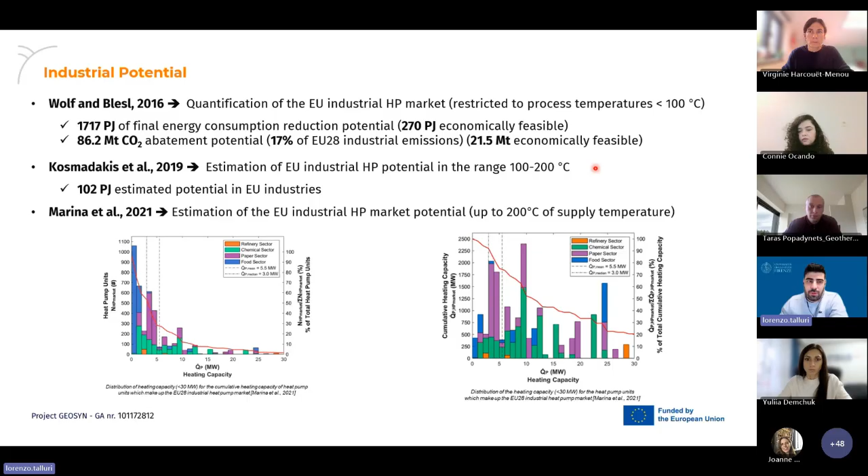Indeed, there could be a nice sector coupling between geothermal energy and industrial processes. Particularly, there are lots of industries such as paper, food and beverages, and chemicals that require temperatures between 80 to 200 degrees Celsius. This could allow the utilization of high temperature heat pumps or normal heat pumps as key technology for enabling next generation and fossil fuel decarbonization.

This is what we want to try to solve, or at least to think about, in the GEOSYN project. The GEOSYN project aims to develop an integrated solution that harnesses geothermal energy. Particularly, we have a geothermal source at about 120 degrees Celsius, upgraded with a high temperature heat pump, and also providing cooling for chilling at about 12 degrees Celsius.

In lots of industrial applications, there is a need both for heat for thermal processes and for cold. For example, in agri-food, the requirement for both heat and cold is very widespread. We at UNIFI are the scientific coordinator of the project and work package leader for the thermal design of the system, and we are trying to coordinate this innovation within GEOSYN.

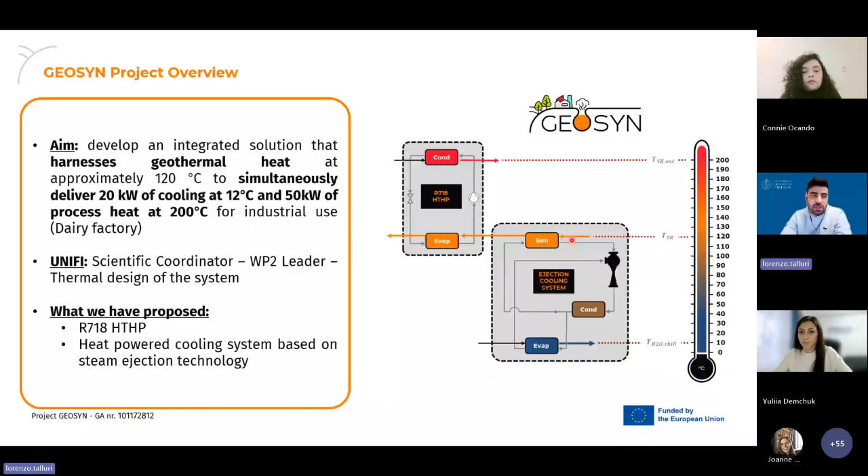GEOSYN project partners are APRE, Geothermal Ukraine, COSVIG, University of Florence, Rivacol, NeoEco, SDU, and SINTEF. This small consortium is very goal-oriented in order to provide an effective solution.

The most innovative part of the GEOSYN project is the benefit of using water as the working fluid. Why water? Because water is the most natural working fluid, with GWP 0, ODP 0, and no PFAS issues. It's not toxic, not flammable, and very cost effective. Moreover, it has very high potential because, for example, the latent heat of condensation at 25 degrees Celsius is 14 times higher compared to R134A.

Obviously not all that glitters is gold, and there are some issues with water, specifically the high specific heat ratio, the very high specific volume of steam, and the normal boiling point of 100 degrees Celsius. These characteristics bring issues that need to be solved: high discharge temperature at the compressor exit, high volumetric flow rates, and compression ratios, especially if we go with the evaporator temperature lower than 100 degrees Celsius, meaning subatmospheric conditions.

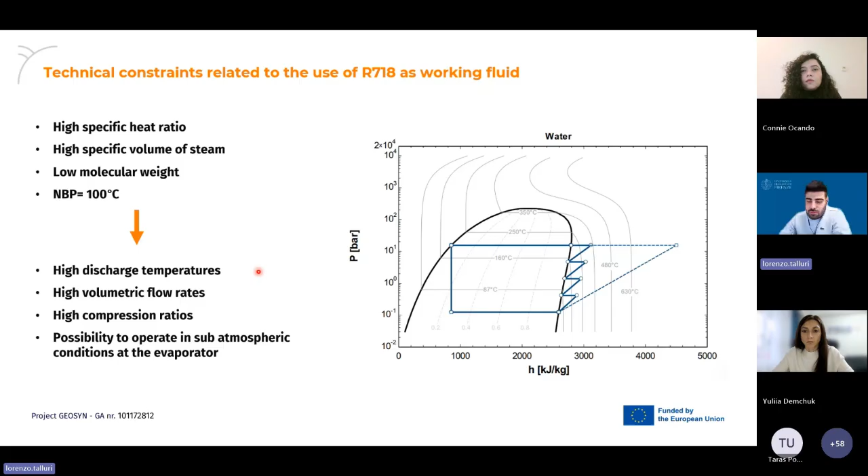So what we needed was a flexible configuration where we have at the evaporator a temperature of about 120 degrees Celsius, and indeed we have steam entering the cheese factory, which is the case study, at between 130 degrees Celsius. We already have a monitoring system placed at the demo site, so we know the conditions of temperature and pressure.

The goal was to develop a heat pump with a condenser duty of 50 kilowatts, a temperature lift of at least 80 Kelvin, and a supply steam temperature of at least 180 to 200 degrees Celsius.

Thanks to these constraints, we obtained a collaboration with Officine Mario Dorin, who are developing a reciprocating piston compressor for this project and also for the twin project TECHIS. This compressor will have 4 stages of compression.

And then the solution implemented: there will be a high temperature heat pump with 4 stages. We have the condenser, internal heat exchangers, and the evaporator. And we also have a receiver for the flexibility of the system.

We can see that with this solution, we could reach, at least theoretically, a coefficient of performance, from a temperature lift of 80 Kelvin from 120 to 200 degrees Celsius, of 3.6, which is well above the target that we set during the proposal writing.

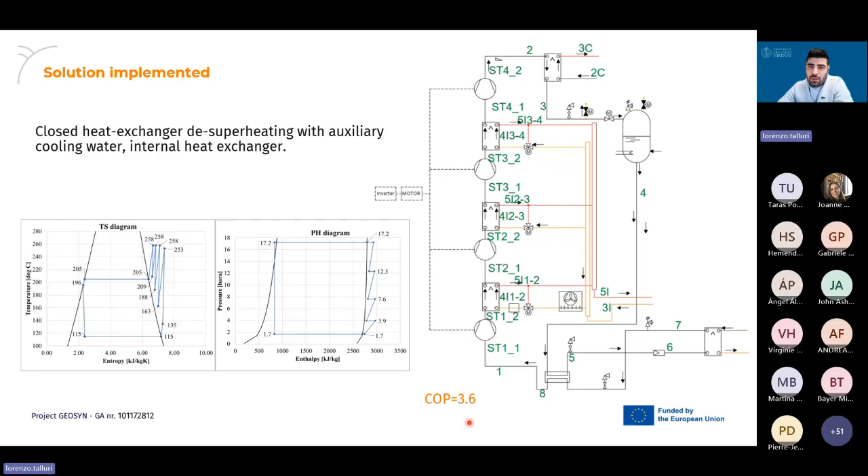This is just one piece of GEOSYN. The other piece is about the ejector cycle, which is still innovative and still uses water as working fluid. We provided thermodynamic modeling with several configurations and also a computational fluid dynamic analysis for the ejector that we will be designing and building completely anew for the GEOSYN project.

Thanks to the calculation of this kind of plant, we will implement this solution: an evaporator where there is direct injection of the water. There are two cycles, let's say a motor cycle, where the water is converted into steam and then provided to the ejector, and then the refrigeration cycle, where the cooled part will go to the case studies, basically speaking. So we have this kind of cycle, one close to a motor cycle and one a refrigeration cycle.

The effective coefficient of performance of this kind of solution is about 0.5, which is quite a good result if we think about heat-powered refrigeration systems.

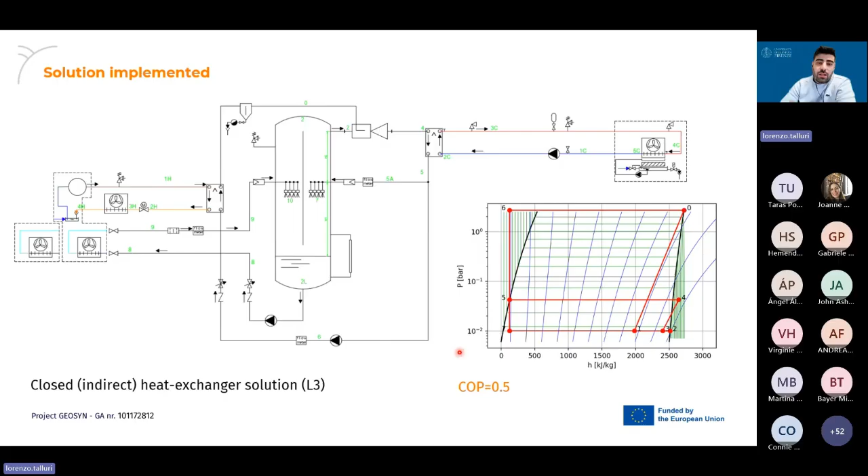And then we have the case studies. We have a real case study, the San Martino dairy factory, which is very close to the Enel Green Power plant, Nuovo San Martino. We have a steam pipeline that provides heat directly to the cheese factory.

We will be able to upgrade this heat and downgrade it to cooling requirements through the innovative GEOSYN solutions. Furthermore, thanks to the work of the whole consortium, we also found several case studies where the application of the high temperature heat pump could be exploited.

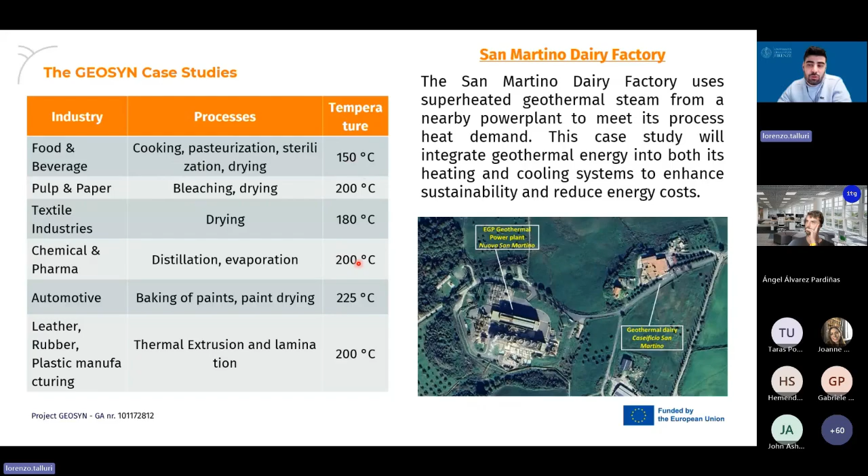But also for the cooling system, this could be exploited, like in the food and beverage, pulp and paper, and textile industries, and then we can see the level of heat temperature required that could be covered by the GEOSYN solution.

So I want to draw my conclusions. Particularly, GEOSYN tries to demonstrate the viability of medium-grade geothermal heat in order to provide both heating and cooling for industry.

The innovative part is the utilization of R718 water as working fluid, both for the high temperature heat pump and for the cooling cycle, which are totally heat-driven. Both technologies are showing potential for coupling with the industrial sector and are especially effective where concurrent heating and cooling are present.

So, paving the way to an energy efficient and decarbonizing manufacturing. Thank you very much for your attention.

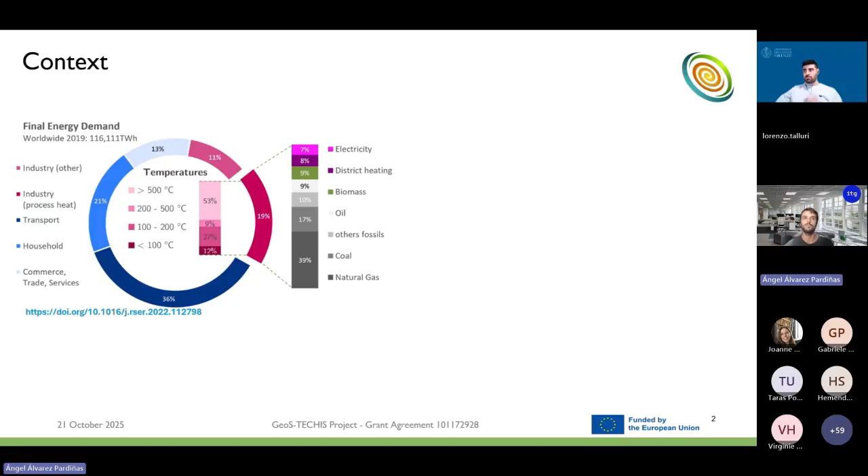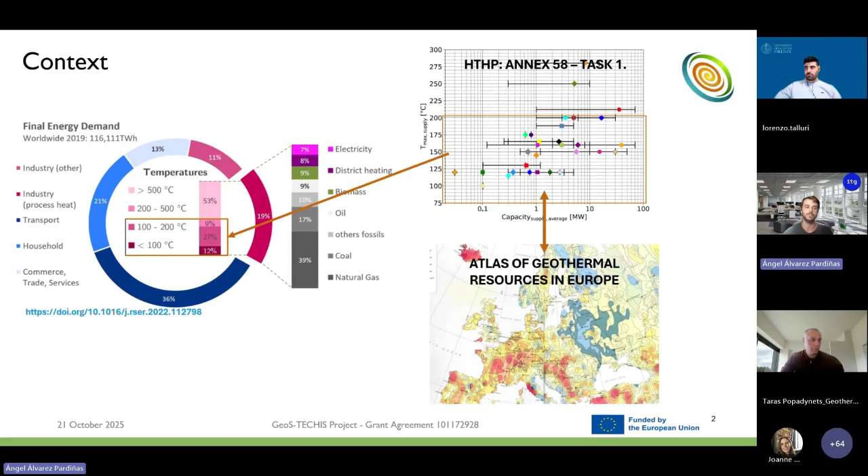Geothermal resources in the range of around 100 degrees Celsius could make a good opportunity for this, and they could be more widespread than the conventional uses of geothermal energy for electricity production nowadays. This is, in a way, the context that powers TECHIS.

TECHIS is an EU-funded project with the focus of decarbonizing industrial thermal processes with geothermal energy and other technologies that have been or are being developed around geothermal energy. We are 10 partners plus one affiliated, spread all around Europe, working collaboratively in this project.

The general picture is not very different from Geosyn, in that we are building on this binomial of geothermal energy at the low-medium temperature range, around 100 degrees Celsius or so, and developing technologies to meet heating and cooling demands for industries. Of course, to bridge this gap, there has to be some thermal system, which we will introduce later, and some other technologies which allow us to take the most out of this binomial of geothermal energy and the demands we are trying to meet.

All in all, in TECHIS, we are trying to support the green transition of industrial thermal energy, reduce the carbon footprint of these industries, contributing to the EU Green Deal, and developing technologies which are transferable to other sectors, not only to the demo site we will introduce later, but also to different heat sources, which could work together with geothermal or even substitute it totally.

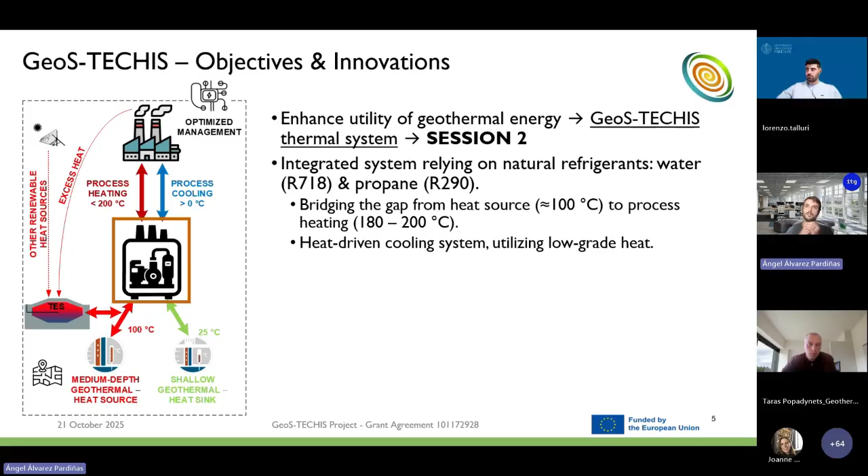For this, we have a specific presentation today in session 2, given by my colleague Christoph Vanasiak from Sintef Energy. I really hope you will be present there, and he will introduce the technology a little further. The idea is that we will have a system which integrates two solutions based on natural refrigerants: a water R718 high temperature heat pump plus a propane ejector cycle, utilizing the low grade heat to produce cooling.

The second of the objectives and innovations within TECHIS is to push the limits that currently exist for thermal energy systems, storage systems, and underground thermal energy storage, in a way that we can push them further in temperature. Currently, they are basically limited to 90 degrees Celsius or so, according to the literature. We want to help, or bring our contribution, to make them more suitable for industrial flexibility.

We are trying to identify the right concepts and model them so that these thermal energy storage systems become usable, not only for our thermal system, the high temperature heat pump plus ejector system, but also for direct use in industry. All in all, thermal energy storage will contribute to the stability of the industrial process and let us leverage heat sources such as industrial waste heat, solar energy, or other renewables.

A very important part of the work we are doing in TECHIS is to develop innovative heat transfer fluids, namely nanofluids, which allow us to store energy at temperatures which water or non-pressurized water does not allow us. So we are developing these fluids which will allow us to store energy at 100 degrees Celsius or above, with excellent heat transfer and heat storage capabilities, and of course, non-toxic and safe to use.

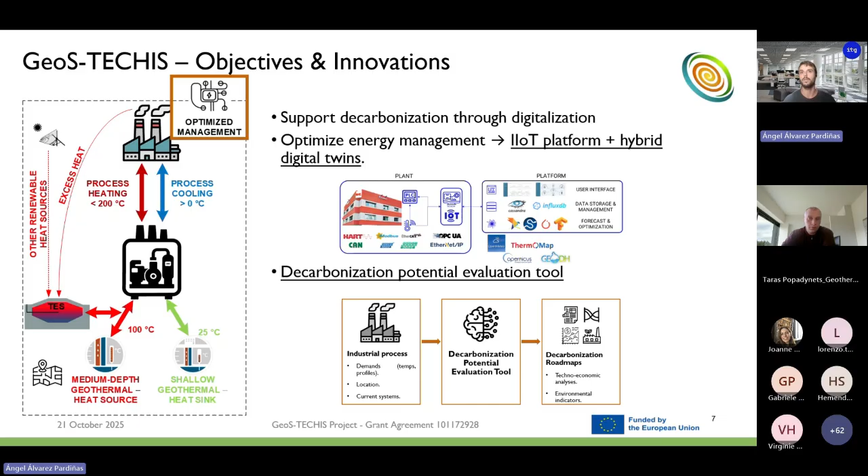So it's a technology, or a tool, which based on data available today, such as satellite data and geophysics data of a certain location, will be able to bring us the right outputs on whether a specific location can be suitable or not for geothermal use, and at which temperatures and at which depth, etc.

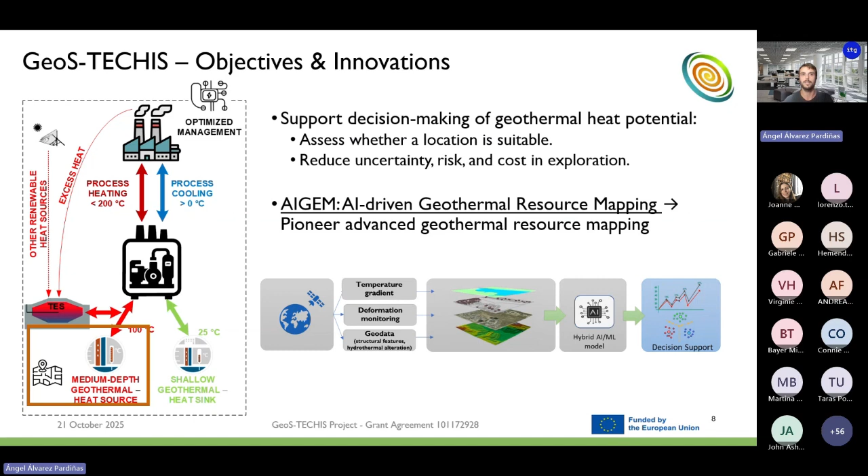Last but not least, the fifth of our objectives: there are a lot of misconceptions around geothermal energy and geothermal supported energy systems, and TECHIS is trying to promote the knowledge and acceptability of these systems, first by properly assessing the environmental and societal impacts they actually have.

We have in session 2 today a presentation which will be held by our colleagues in Leitat, in Catalonia, Spain, around this topic, so I will not disclose too much right now. But the idea is to actually assess what is happening in these kinds of systems, to understand which is the actual knowledge of society and industry on the potential of these systems. In the end, we will provide in TECHIS materials to communicate our findings and educate industry and stakeholders around the topic.

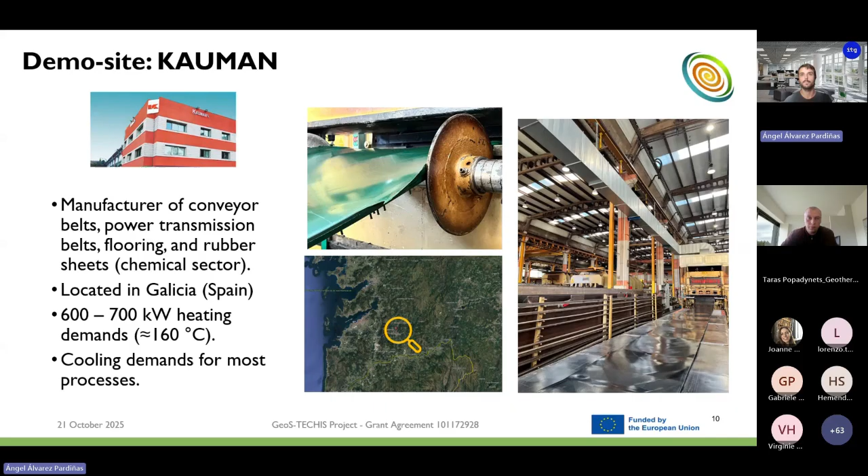And last, I would like to introduce the company which is our partner, helping us validate all these technologies and developments - Kauman. They are a partner of our project, they manufacture conveyor belts and power transmission belts, located in Galicia, Spain, northwest of Spain, above Portugal. It's the perfect example of industry combining heating and cooling demands at the temperature levels we are aiming here at TECHIS.

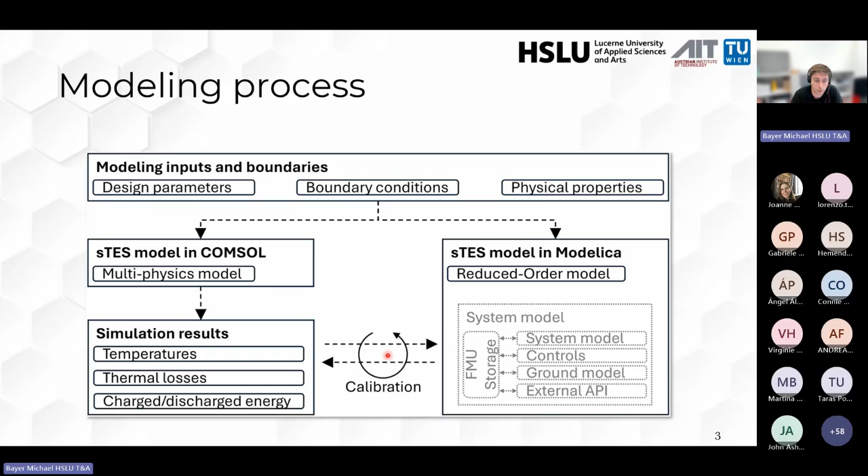Here you can see the key design parameters which we used. So the parameters have different size variations. We made simulations from 20,000 up to 200,000 cubic meters with the given parameters here in the list for soil and fluid and so on.

For the simulation itself, we made 5 complete annual cycles, where one cycle is represented by 90 days of charging, 90 days of storing, 90 days of discharging, and 90 days of idle phase. In total, we made a 5-year simulation, and for comparison of the results, we use the 5th year.

Here you can get a quick insight on the COMSOL model which was used. It's the DePlaTES model developed by AIT. This is supported by the finite element method, and it includes multiple features, so you can simulate all kinds of different seasonal thermal energy storage systems with it. For this study, we focused on a water-based system without groundwater flow in the soil.

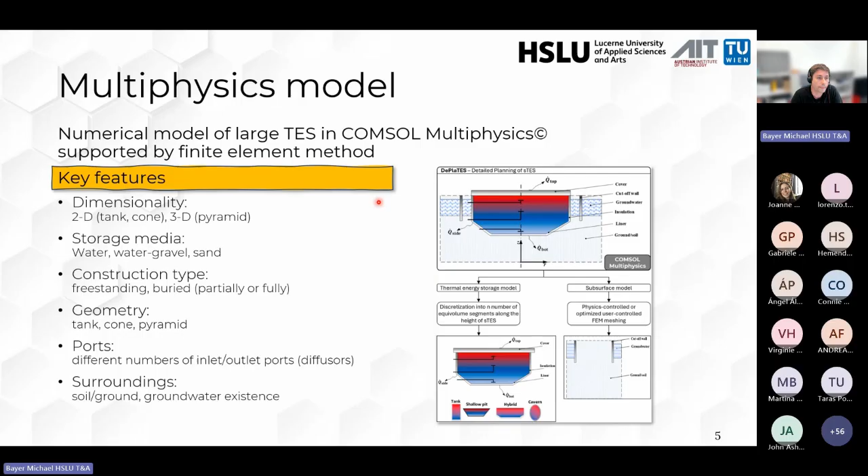We used equidistant discretization for this. For the study, we used 200 layers within the tanks, and you're able to connect basically each layer of the tank with in and out flow connections. Then for the ground model, we created a 2D grid with finite volume method, where each element is represented by a 4R1C network to simulate the interactions between the ground and the tank.

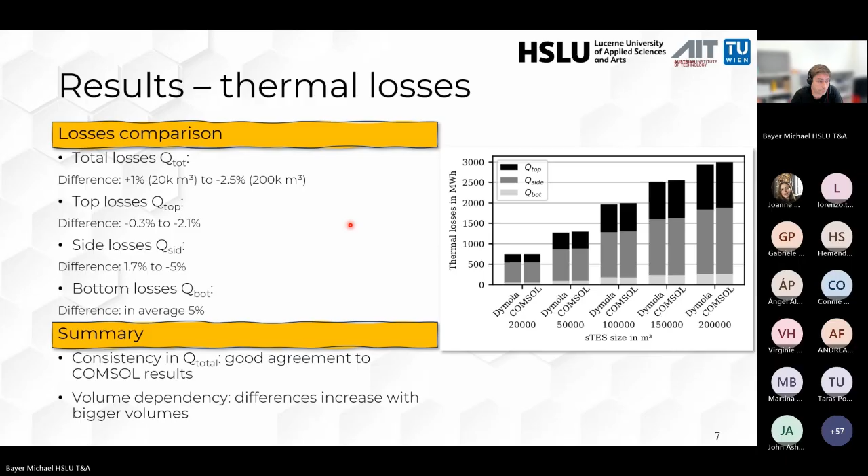dynamic events occur, the temperature profiles from the two models show minor deviations. For example, during charging, the Modelica model initially underestimates the temperature slightly, but once it continues, it slightly overestimates by 1 Kelvin. Those differences are largely due to solver settings and the different discretization methods used.

The COMSOL model uses advanced solvers, integrating the energy balance equation over the entire discretization element, but Modelica, for example, exports the temperature data at the center of each cell corresponding to a relative height and follows a nodal approach.

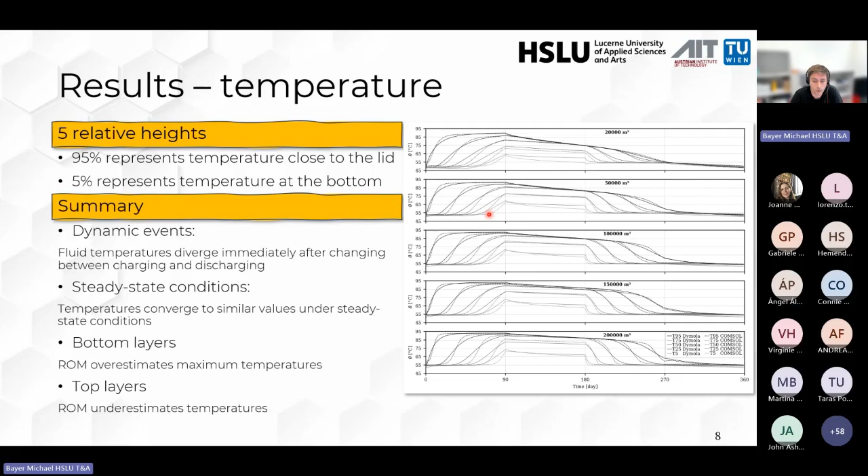Although there is still slight room for improvement, for example in extreme cases when the tank is very small or rather very big. What's also to mention here, as you can see, the best performer is the 100,000 cubic meter storage, but this is because we started with this one, and all the calibration and validation was done with it, and then we scaled it up and scaled it down.

Smaller storages basically have a higher surface-to-volume ratio, and in these cases, the thermal losses are more dominant and the stratification is less important. But for larger systems, they have stronger thermal gradients and stronger stratification, especially near the inlets and the tank bottom.

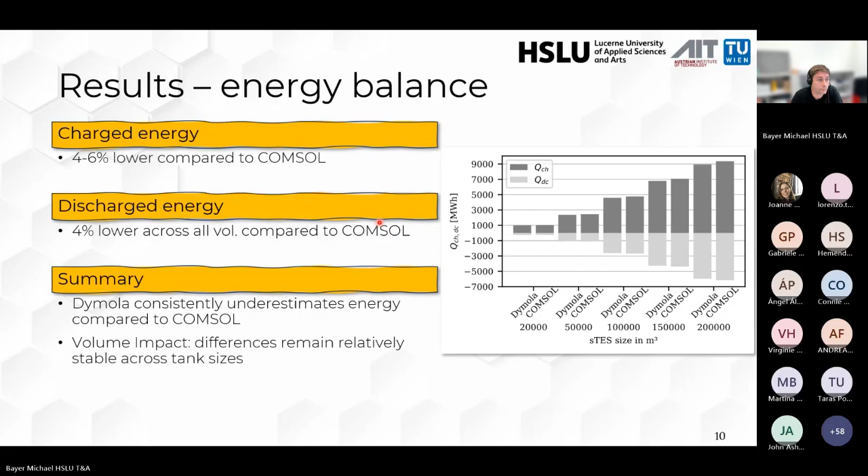and by use of the MUMPS solver. In Modelica, we used the Dassl solver, and we ranged time steps between 10 minutes and 1 day. For both comparisons, we used the same machine, and we were able to reduce the simulation time by up to 98%.

Which already brings me to the conclusion. The reduced order model has demonstrated strong performance, achieving deviations of less than 2% in temperature simulation. During the calibration against COMSOL simulation, the model was highly efficient, and we were able to complete a full year simulation in roughly 4 seconds.

For example, if we simulate something like Dronninglund, which is highly complex, then it increases. But for the annual simulation for Dronninglund, we still manage with roughly 1 minute simulation time.

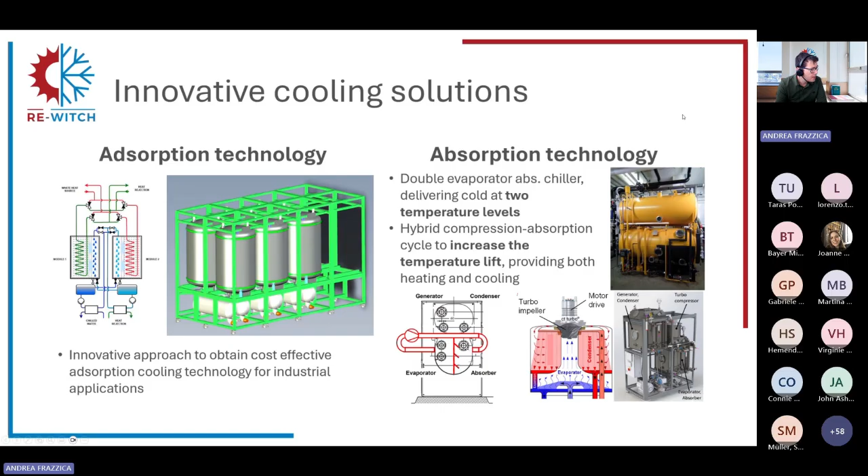The other technology needed for the full system is the solar thermal collector one. Here, we are not developing a new technology, but profiting from an existing one provided by the Swiss company TVP Solar. This is a unique technology because they work with flat plate solar collectors, but fully operating under vacuum, which means they minimize heat losses.

So they can reach up to 200 degrees C even without concentrating solar technologies. This has a very good selling point, because the installation in the plant is much easier—you don't need any concentrating or tracking, and in the end the maintenance is much easier. Our target will be to install this technology in parallel to the existing waste heat in order to provide heating to our absorption cycles.

The other point is on the designing of the demo site. We are basically working with two parallel tracks. One is profiting from a digital twinning environment to maximize the efficiency in the design.

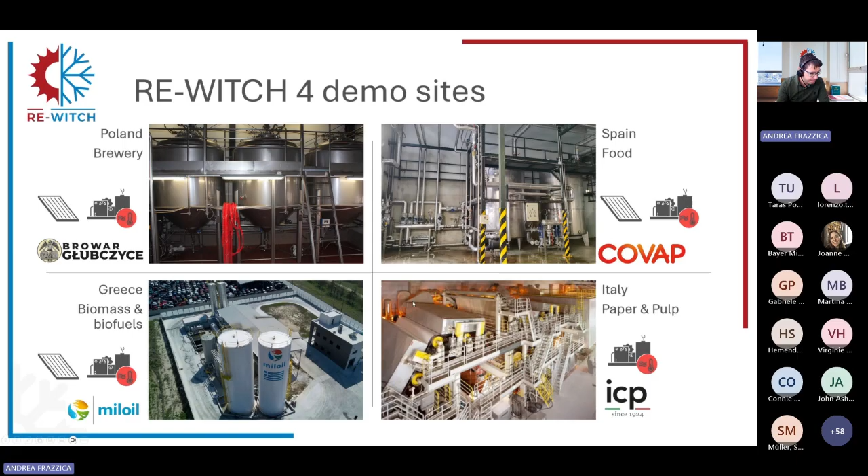Here is a quick overview of the current status of the different digital twinning we are developing for the four demo sites. Of course, we are now working on the current configuration, trying to model all the sections of the plants that will be affected by the RE-WITCH integration. Next steps will be to use this preliminary digital twin to derive the designing phase of each demo site.

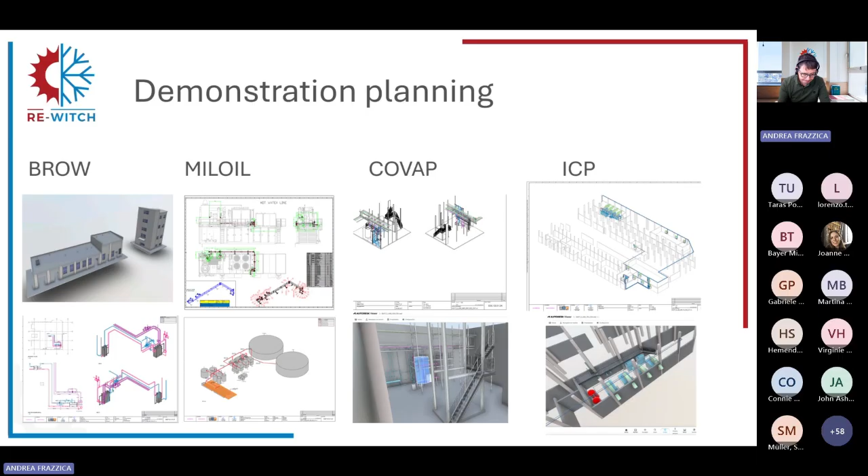So what's next? As mentioned, we are now in the manufacturing phase of the first prototypes. This will be ready probably by the end of this year, and then in early 2026 we will start the testing campaign in the lab infrastructures that are part of the project, in order to finalize the design and optimize the operation of the technologies.

We are now working on the cloud-based monitoring system that will be installed in all the demo sites to start the data collection for the baseline analysis, which will last for the entire 2026.

As mentioned, we are finalizing the design of the demo sites. We expect to have the design finalized by the first months of 2026, to move on with the procurement and installation of the equipment in all the demo sites until the end of 2026, in order to be ready to receive all the technologies on site and install them to start the final year of the project, which will be mostly dedicated to monitoring the technologies' operation.

Thanks for the introduction. My name is Simon and I'm a researcher working at the University of Applied Sciences in Ingolstadt, Germany. I'm happy you decided to join today and listen to my presentation about a modern benchmark of an adaptive thermal source network, at an industrial site called the InCampus, which was already mentioned earlier by Michael Bayer. The research related to this presentation is part of the INTERSTORES project.

As introduction, we will have a short look at thermal source networks in general. Afterwards, we will dive into the specifics with the system description, and I also brought some examples about the envisaged operation, first monitoring results, and one exemplary planning step.

Some of you might already know the concept of thermal source networks, short TSN. The IEA-DHC Executive Committee defined them as networks mainly used as a source for heating and cooling by decentralized technologies such as heat pumps, as you can see on the right side. There are multiple benefits of these systems, but I'd like to mention two right now: the low temperature levels of these grids, which make integration of renewables easy, and the fact that heating and cooling can be facilitated with the same infrastructure, increasing energy efficiency. We'll have a closer look at how that's achieved later.

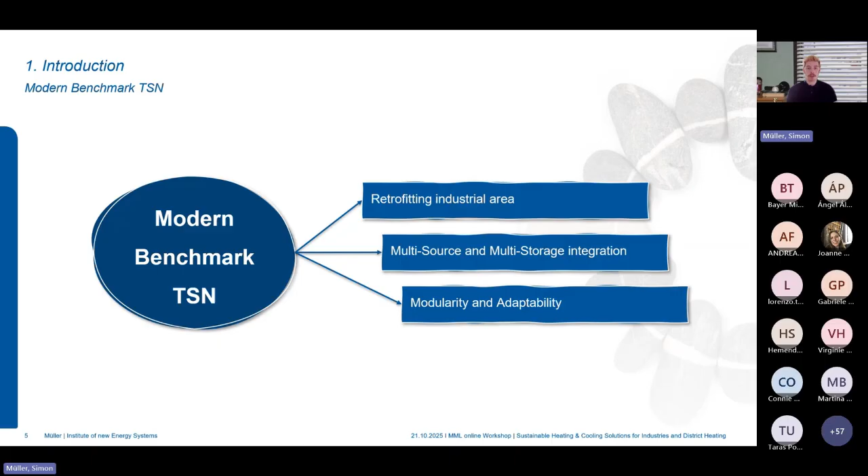With those two aspects of TSN, you can already see that they can help move to a more climate-friendly future. Today we're going to look at a system which can be seen as a modern benchmark of those TSNs in terms of retrofitting industrial areas, multi-source and multi-storage integration, and modularity and adaptability.

The TSN I'm referring to is called the InCampus, a planned 75-hectare industrial park which will consist of up to 70 non-residential buildings. The area of this project is situated in Ingolstadt, Germany.

But before I show you some recent information about the InCampus and the related energy system, I want to take a quick look back in time and see what was happening at the InCampus before.

Until 2008, the area we're talking about was occupied by a refinery, which started operation back in 1965. Sometime after the refinery shut down, the area was sold for €1 symbolic to the city of Ingolstadt and Audi, which is also headquartered in Ingolstadt. Both partners agreed to refurbish the area into an open technology park.

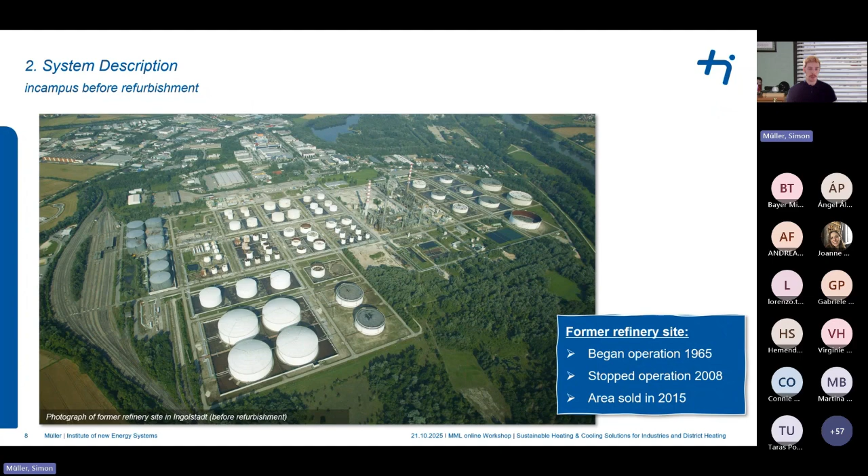Now we can already see that path from the old refinery site towards this new TSN system called the InCampus. All of that process started with a soil remediation process to get rid of the contamination left from the refinery's operation.

90% of the washed soil was again used on site, for example for land leveling. Some of the gravel part that was washed is being utilized in combination with old fire extinguishing basins, which you can see here, to build a seasonal thermal energy storage, which Michi Bayer mentioned earlier, part of the INTERSTORES project, which is pretty cool. So we're using pre-existing infrastructure to build seasonal thermal energy storages.

Next to that, there are also groundwater wells, which keep the remaining contaminants from being washed away, and those can also be used as a thermal source or sink for the TSN, which you will also see later on.

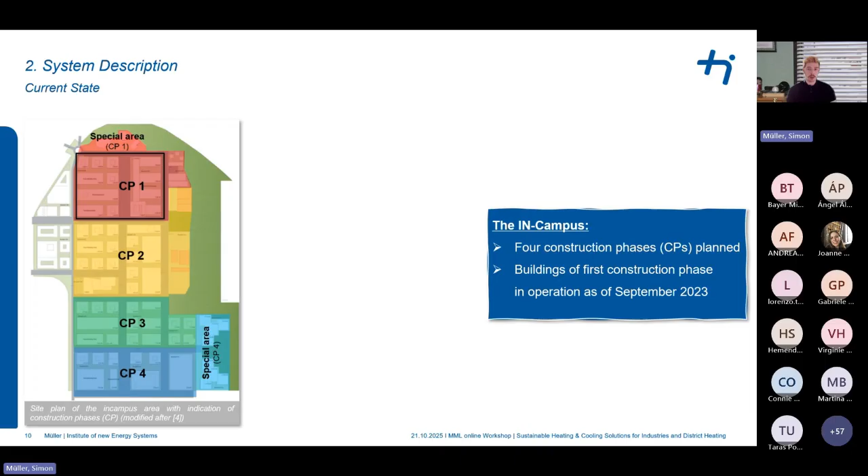Now that we're all cleaned up, we can start with the current state. Currently, the InCampus is still under development. Overall, there are 4 construction phases planned to develop the whole area, but since September 2023, the first 4 buildings of construction phase 1, which you can see here, went into operation and were connected to the TSN.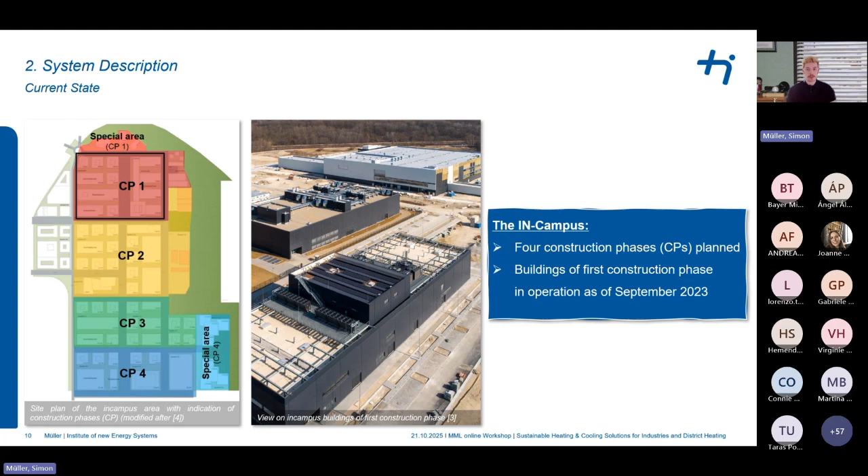The TSN infrastructure itself is already installed, so pipes are equipped for the following construction phases. It just needs new buildings to connect to it.

And now we will have a closer look at the envisaged operation of the buildings and networks in construction phase 1. There are 12 buildings planned for construction phase 1, some office buildings, a security center where security features of cars are tested, and a data center, which has a significant waste heat potential.

The demands of all those buildings in construction phase 1 sum up to around 7 gigawatt hours of heat demand per year and around 26 gigawatt hours of cooling demand. What you see at the bottom of the slide are the projected load profiles. In blue, you can see the cooling loads with an offset because of the steady cooling needs of the data center, and in red, the heating demands. You can see that a lot of the time those demands are overlapping, starting in September all the way through winter until mid of May.

There is something which can be called balanced demand. This is the case when one of the buildings connected to the network has a heating demand and another building, because of its function or utilization, has a cooling demand at the same time. So at the end of October, for example, the data center with its cooling demand will eject heat into the network via heat exchanger. And on the other end of the network, some office buildings with heating demands will extract some heat via the heat pumps. So instead of fulfilling the demands separately, the demands are balanced in the TSN.

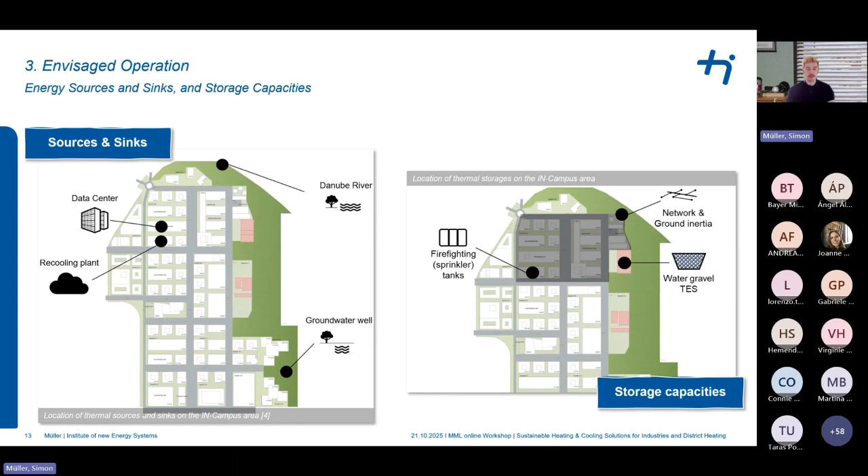And now we bring all of these components together, and we can understand the envisaged operation. In the center, there's the TSN, which is connecting all the different components of the energy system. Now, during winter, the buildings have a dominating heating demand, which is to some extent balanced by the waste heat from the data center. Additional heat supply can come from the thermal sources or discharging the S-TES.

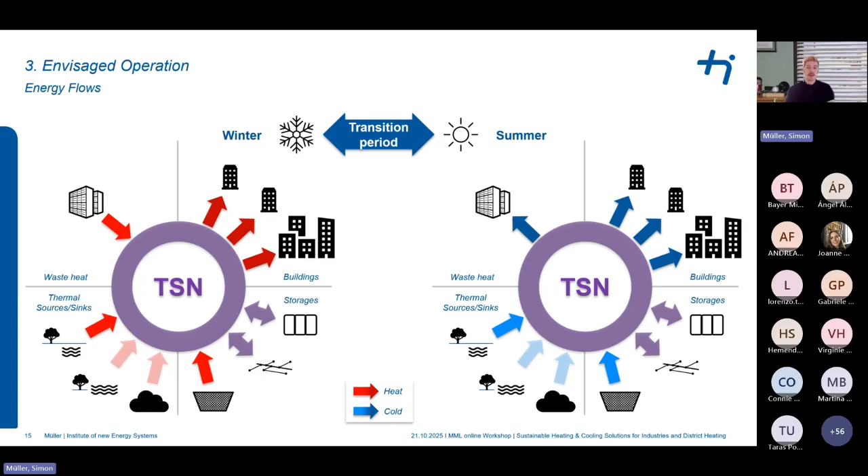Now, during summer, the demands of the buildings change, and most of them will have a cooling demand, or you could also say they supply exhaust heat to the network. The waste heat from the data center does not really help with that, but adds even more heat to the network. Accordingly, all the surplus heat is either charged into the S-TES, which is just another way of saying there is cold discharge from the S-TES, or the surplus heat is discharged to the displayed heat sinks. That means, for example, groundwater wells or the Danube are providing cooling energy, and that is why the blue arrow is directed towards the system.

And that is as far as I would like to go about the monitoring today.

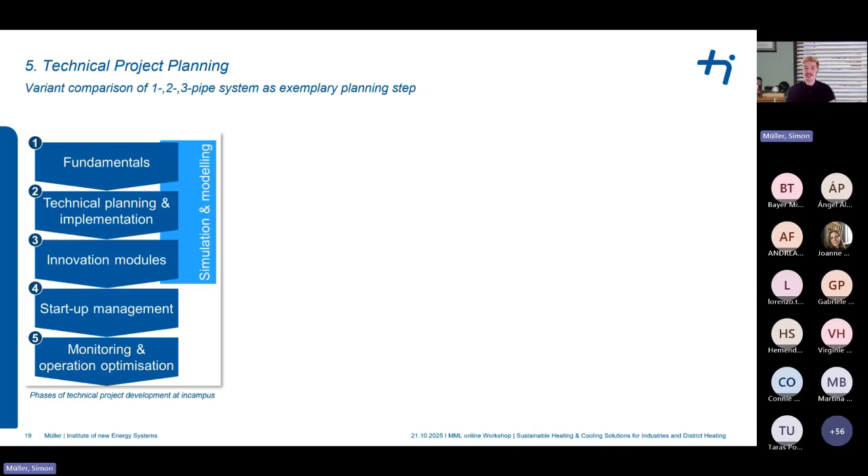But I brought some more insights into the technical project planning of the InCampus for reviewing the overall documentation of the project. The 5 main phases of the technical project development were derived, and because I don't have time to go into all the chapters in detail, I brought one exemplary planning step, which is the comparison of different network types.

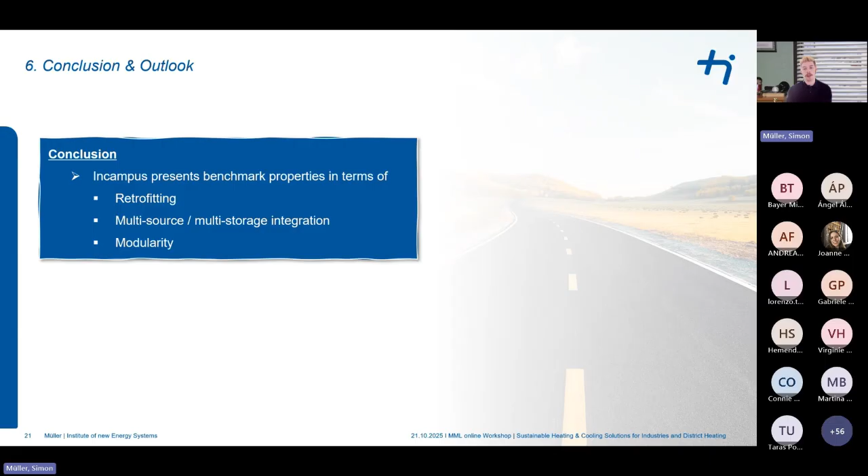Now we've seen a brief overview of the InCampus energy system, and in some details we were able to grasp the benchmark properties of it. Originating from a former refinery site, the InCampus presented itself as a benchmark in terms of retrofitting. With the planned operation, we could see the multiple sources and multiple storages that are already included or will be included. From the first monitoring results, we saw the system's operation in partial load, but even more important is that the energy system planning considers the modular expansion and integration of many more industrial demands in the future. Accordingly, future research will be oriented toward the transferability of the system. The first step in this regard is to analyze the planning process, which we did. So we have more steps ahead.

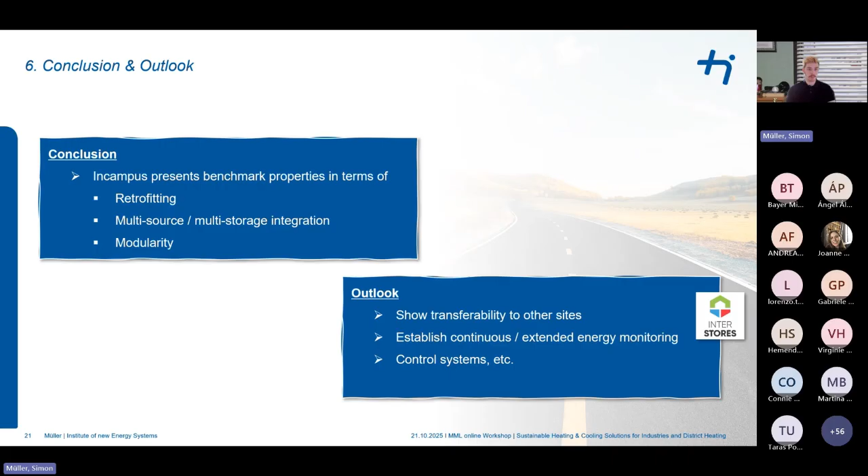Establish the energy monitoring to have a continuous report, not just once, and also go more in the direction of control systems, including the seasonal thermal energy storage, and maybe start to have an MPC at the InCampus. That would be all from my side. Thanks for listening, and I'm happy to answer questions in the chat or later in our Q&A session.

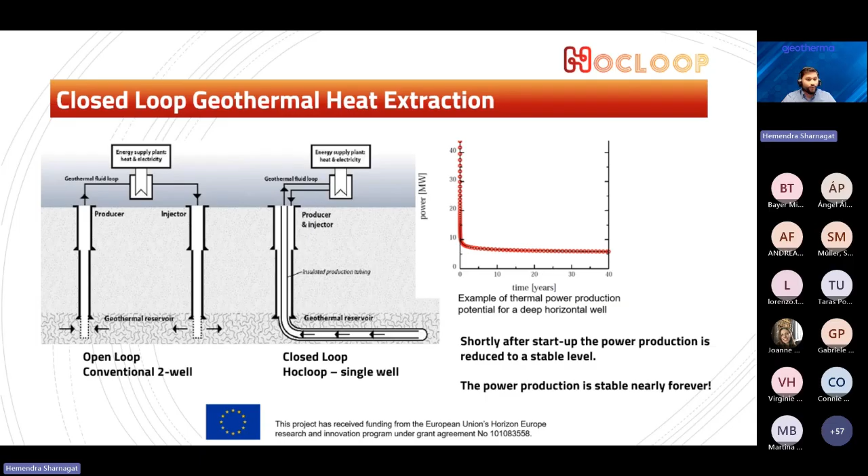And it's continuous, vacuuming along the whole tubing in the well.

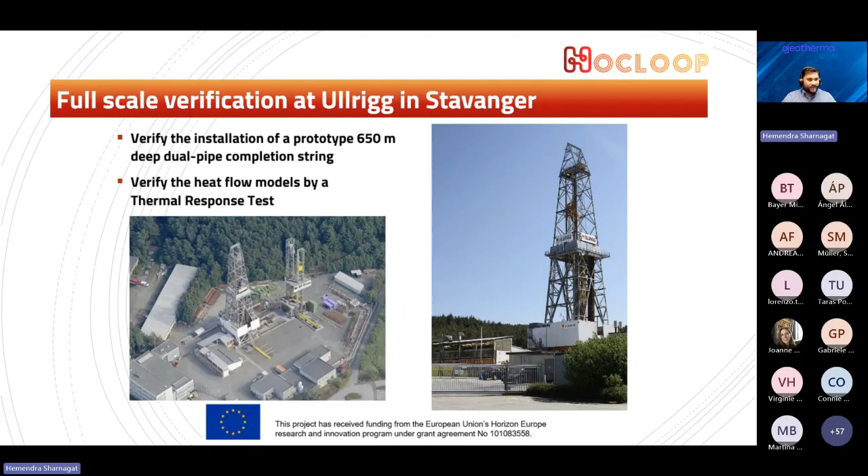Next slide, you can see also the picture from the site. You can see all the laying down of the dual pipe. We also called it DHS, dual heat string. So that's the name we've given these pipes. And here are some more pictures from the original site.

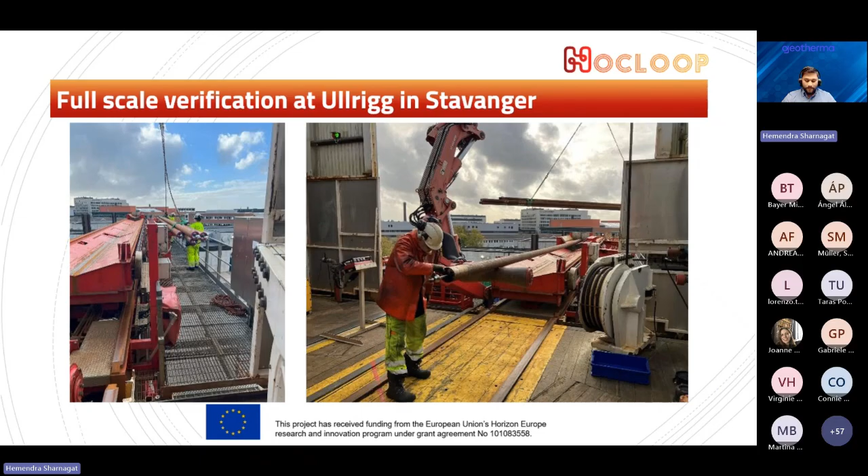Further work includes using alternative fluid options, which can improve performance, and increasing power through new well construction. As already mentioned, this solution is portable and can be used in any location with potential.

So it's a very short presentation, and thank you for listening. Thank you, Hemendra. Thank you very much again.

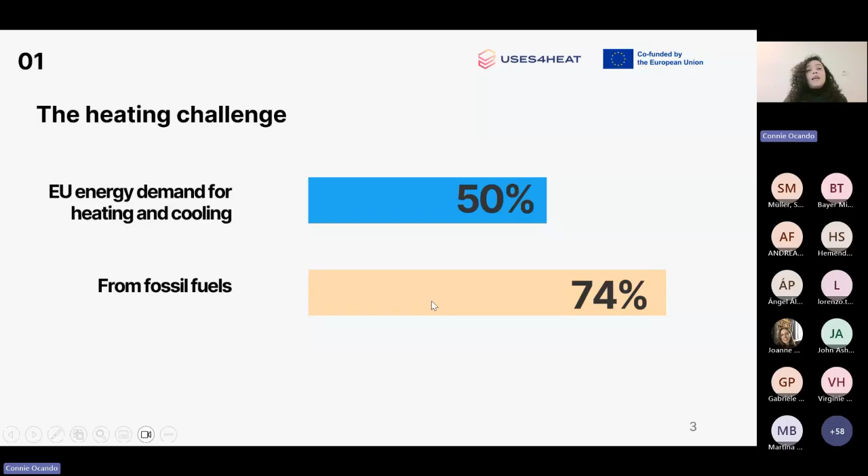But this is not only a climate issue, heat decarbonization is also a matter of energy security. We must make the Union independent from Russian fossil fuels by 2030.

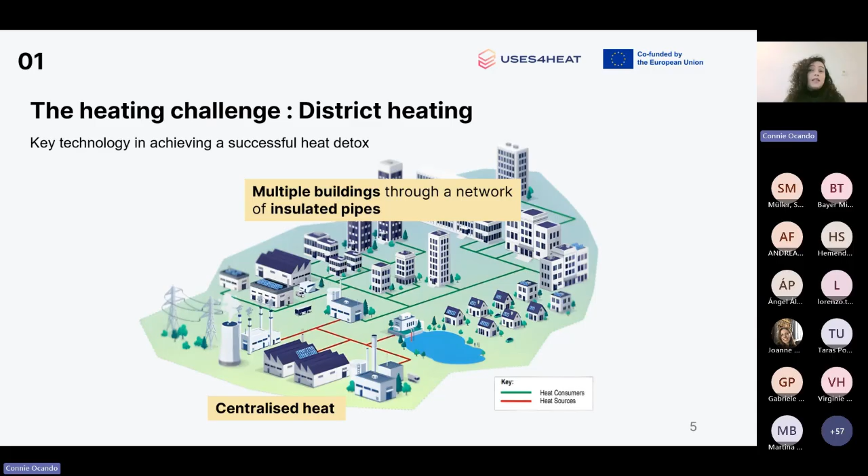And this is where district heating comes in. District heating is a centralized system that distributes heat to multiple buildings, so it is a key technology for decarbonizing our heat systems. Why? Because district heating allows for multiple renewable inputs and also allows the integration of energy storage, and of course improves system resilience.

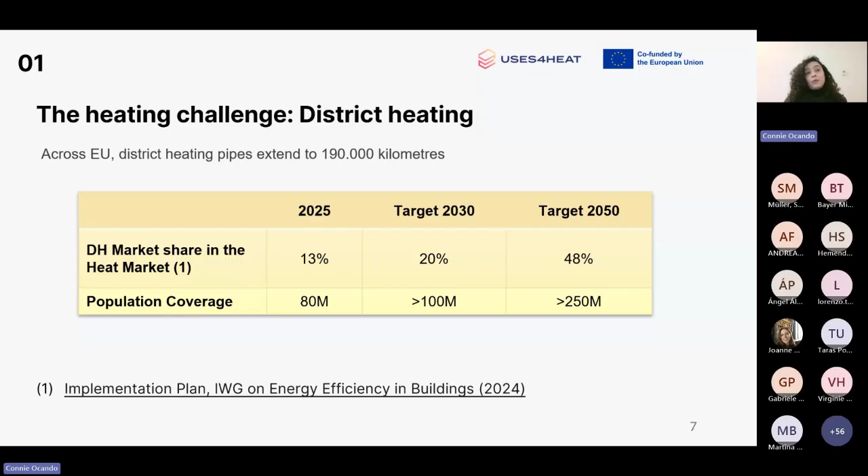But before the end consumption, we can have storage, so thermal energy storage. That is a technology that stores heat or cold for later use, for example capturing excess heat in summer to use it during winter. This technology helps district heating systems operate more efficiently and enables better integration of renewable energy sources by balancing the mismatch between energy supply and demand.

This technology stores heat in underground rock or soil. It uses vertical boreholes with U-tube heat exchangers carrying heat transfer fluid. The efficiency of the technology depends on the borehole design, the pipe material, and the thermal conductivity. This technology shows easy scalability and limited geological requirements, making it highly appropriate for large-scale installation.

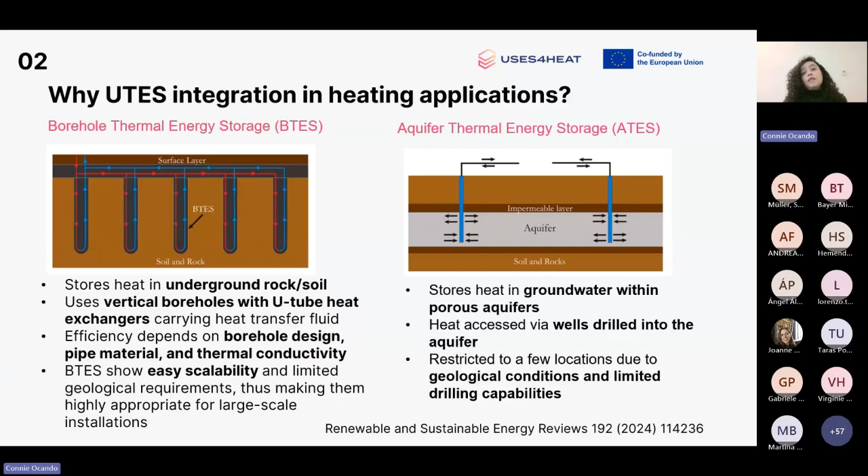Then we have aquifer thermal energy storage. This technology stores heat in groundwater within porous aquifers, and the heat is accessed via drill wells into the aquifer. This technology is restricted to a few locations due to the geological conditions and limited drilling capabilities.

So here, USES4HEAT is demonstrating 5 key technologies to enable cost-efficient, optimized seasonal storage heating. First, we are developing advanced aquifer thermal energy storage drilling equipment with remotely controlled machines. We are also developing innovative high-temperature groundwater heat pumps connected to aquifer thermal energy storage and, of course, to district heating networks. We are also developing highly efficient and cost-effective solar thermal collectors.

Of course, this will be integrated with high-temperature boreholes, thermal storage, and also innovative larger piping for high temperature boreholes. And we are also developing enhanced solar hybrid PVT panels.

We have assessed the viability of these 5 technologies at 2 demo sites in Italy and Norway. In Italy, the demo site is Riva del Garda. We have developed the drilling unit manufacturing, which is nearly complete, and also the PVT absorbers were tested and the groundwater heat pump components were defined. Nevertheless, we encountered some issues because of the lack of regulatory frameworks in Italy and the limited geological knowledge.

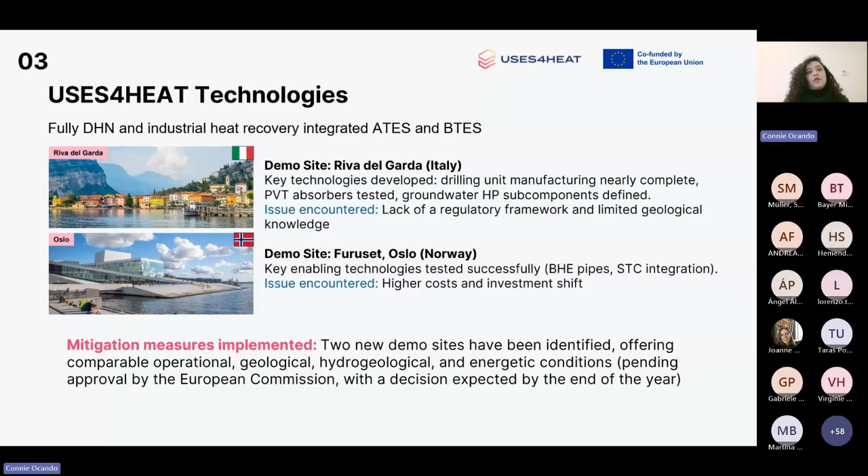So in conclusion, what we expect from USES4HEAT is to increase the availability, robustness, and safety of sustainable and efficient choices for energy storage, to increase security of supply, reduce energy loss, improve cost effectiveness, and improve the environmental footprint of the energy system.

We expect to increase the technological leadership, competitiveness, and technology export potential of the European storage technology industry. We expect to enhance the sustainability of storage technology, taking fully into account circular economy, social, economic, and environmental aspects in line with the European Green Deal priorities.

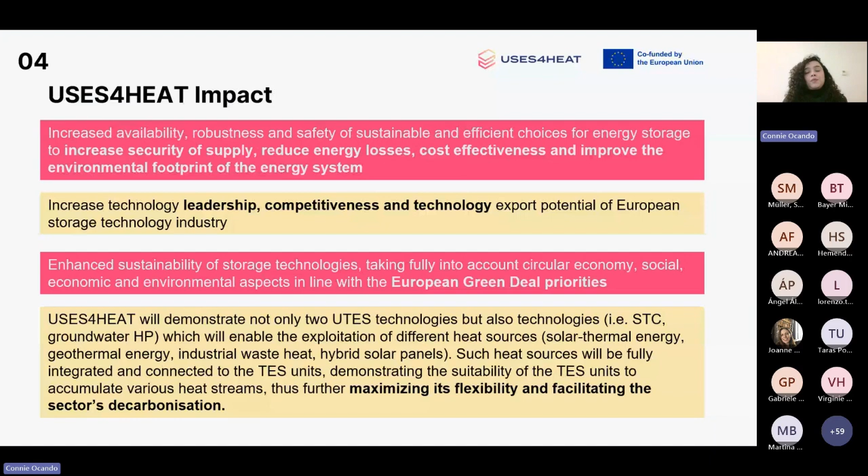USES4HEAT will not only demonstrate underground thermal energy storage, but also different technologies like solar thermal collectors and groundwater heat pumps, which will enable the exploitation of different heat sources like solar thermal energy, geothermal energy, industrial waste heat, and hybrid solar panels. These heat sources will be fully integrated and connected to the thermal energy storage units, demonstrating the suitability of this technology to accumulate various heat streams, further maximizing the flexibility of the sector and its decarbonization. Thank you very much, and that's all from my side.

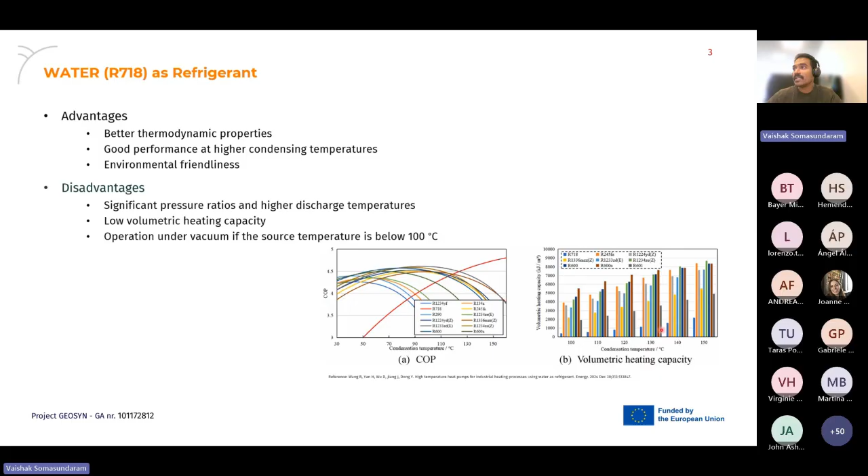As my colleague mentioned, we are developing a heat pump to demonstrate our idea. The heat pump we are targeting to develop has a capacity of 50 kilowatts, with a 4-stage oil-filled reciprocating compressor being developed by Dorin for this application.

One of the main technological constraints during development is that we need to limit the discharge temperature of the compressor below 270 degrees centigrade. To achieve that, we provide intercooling between two stages of compression, and the compressor has 4 stages based on limiting the discharge temperature.

In addition, in our basic configuration, we have an internal heat exchanger at the suction of the first stage to have the required superheat and to avoid any liquid compression at the first stage. The system is designed for an evaporator temperature of 120 degrees centigrade and a condensing temperature of 200 degrees centigrade, with an objective to achieve a temperature lift of 80 Kelvin.

So the heat pump we are developing targets applications where the temperature varies from 180 to 200 degrees centigrade. These applications exist in industries related to food and beverages, textile, paper and printing, chemicals, and pharmaceuticals, as well as rubber products, plastic, and glass manufacturing.

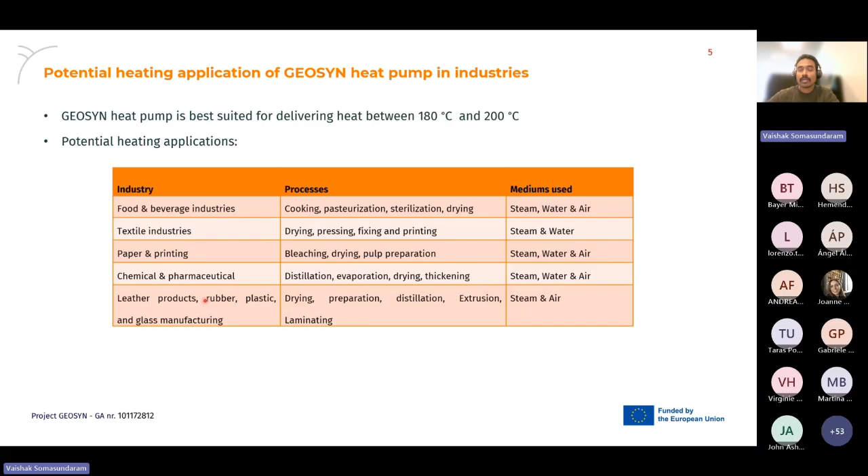For the present study, we have selected a case where the heat pump we are developing can be used. We are focusing on a rubber product manufacturing industry.

The steam boiler feed water or condensate return temperature is at 103 degrees centigrade, and it is heated to 183 degrees centigrade. The steam boiler presently uses heavy fuel oil as the heat source and has a capacity of 2.1 megawatts. Like any other industry, the steam produced at 183 degrees centigrade and 10.3 bar is then throttled for different applications.

This model is developed based on the nominal operating parameters of the heat exchangers as well as the compressor, that is, no dimensional parameters are used here. This is because our actual heat pump is under development, so whatever data we currently have is very limited.

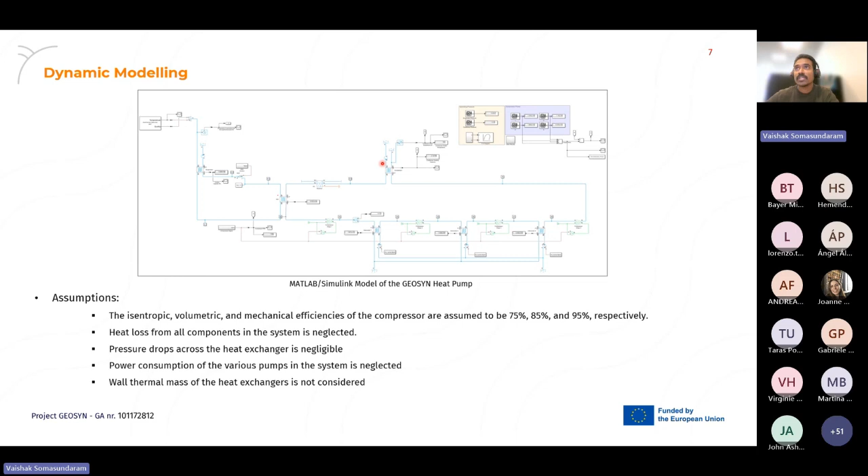The main dynamic input is the geothermal source temperature, and the heat load to this model is assumed to be constant, at around 2.1 megawatts.

For the geothermal source temperature, we are monitoring the data of a geothermal well, or a geothermal plant, located at Tuscany, Italy. We are monitoring the source temperature at that well, and the data is recorded to our technology partner database, available at our dashboard. From this data, we have selected a suitable profile for this particular analysis.

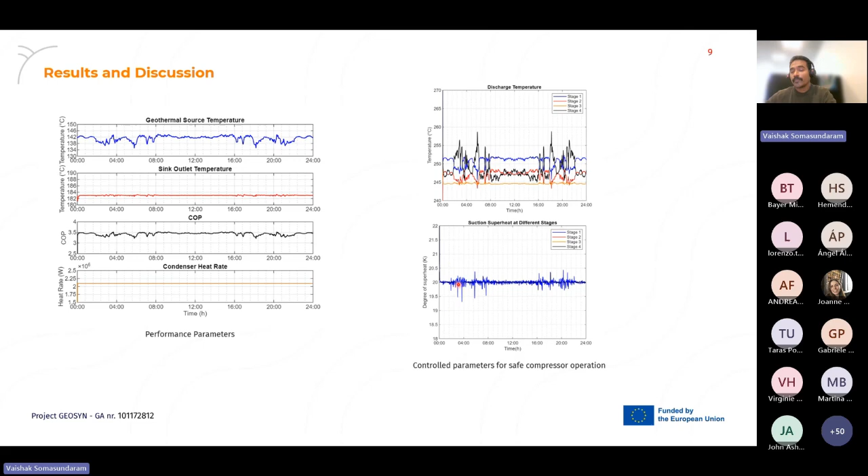It is very important to note here that currently we have considered a Denmark scenario which relies mostly on renewable energy sources. However, for countries which rely on natural gas or thermal power plants, the scenario will be different. For example, for countries like Italy, the operating cost of the heat pump will be higher than the one we are having for Denmark.

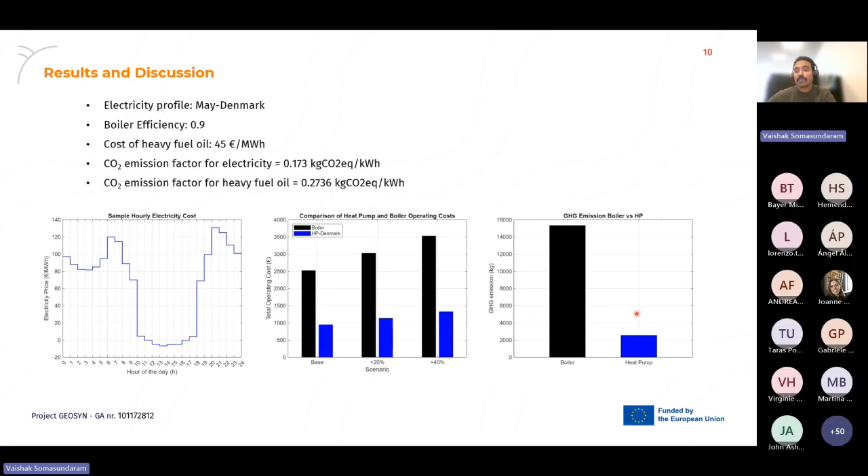So these are my conclusions. Under the simulated condition, we have observed that the proposed heat pump for the Geosyn project can achieve a COP of around 3.5. We are expecting an operating cost reduction of up to 62% compared to conventional boilers operating on heavy fuel oil in this present case, and we are expecting a greenhouse gas emission reduction of up to 83% compared to the boiler system.

In future work, we are focusing on calibrating the model, because most of the assumptions here are based on initial guesses, and we will be calibrating as well as validating this model based on our experimental test results.

In the further stage, the validated model will be used for further virtual case studies, which comes under our project. So we would like to acknowledge the fund received from the Horizon Europe grant. Here we have shown the Geosyn consortium, which involves 10 partners from different parts of Europe. That is brief about our project.

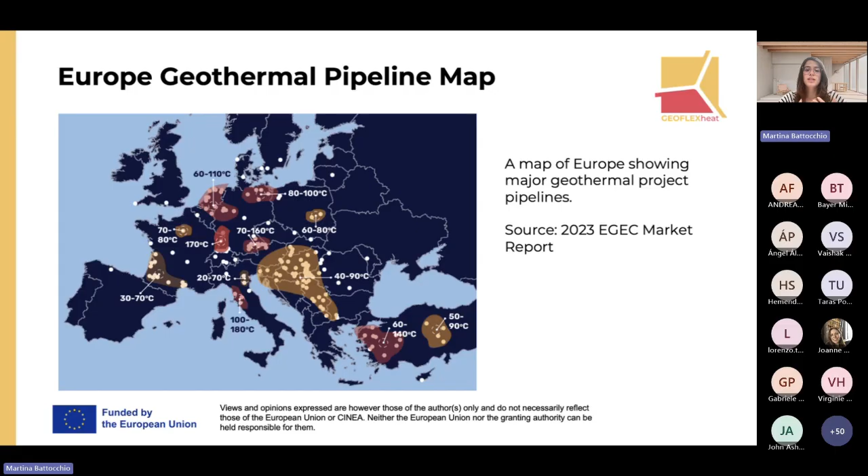Here you can see the Europe geothermal pipeline map. EGEC, the European Geothermal Energy Council, has shared this visual in their market report in 2023. I think that this map clearly shows how there is a lot of availability in terms of geothermal energy in Europe, in some areas more than others, and with different levels of temperatures. But the source is there and it's ready to be fully utilized.

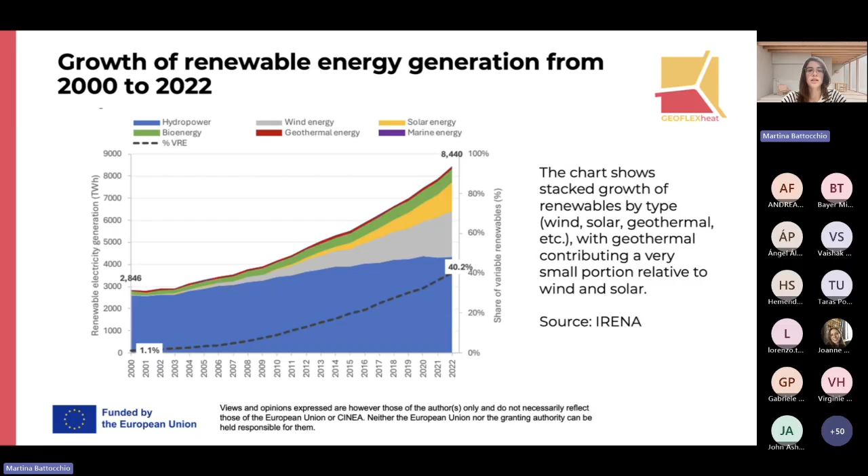From a policy outlook, I wanted to present what the EU and also national decision makers are doing and what they should do. The European Commission and the European Union in general are supportive of geothermal energy. But we must not forget that implementation is national, so the countries need to remove the barriers and stimulate themselves what the EU signals are.

For example, countries like Germany are moving to fast-track geothermal permitting and putting in place some scalability templates that will allow anyone who wants to fund or implement a geothermal project, a template that is ready and is harmonized. So what's needed now is to harmonize and make the rules more pragmatic, and also target them towards de-risking finance and standardization for industrial applications.

So the top policy levers to unlock this scale up are, first of all, permit streamlining and legal clarity, targeted public risk sharing, standardization and technical codes, and also community engagement and transparent monitoring.

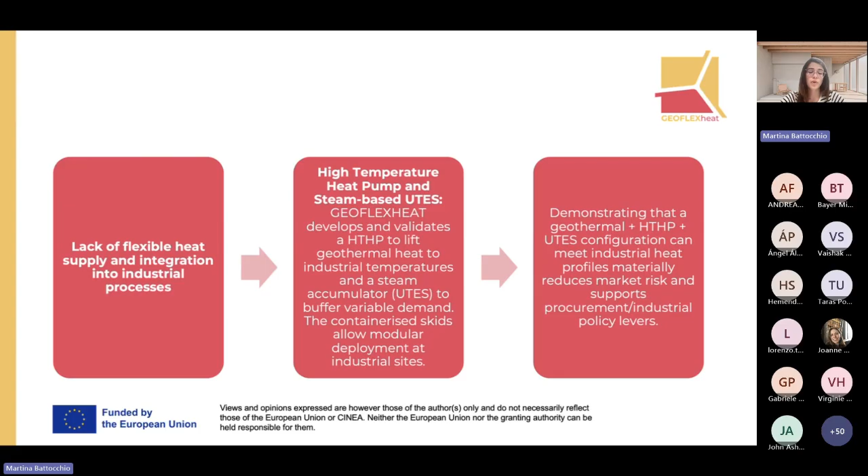The next barrier is permitting fragmentation and the lack of standardized demo data. GeoFlex is doing standardization and policy work to provide policy-ready documentation and demonstrator data, helping regulators create harmonized permit procedures and reduce the time to approve industrial replication.

Another barrier is social acceptance and local opposition. Some partners in GeoFlex are developing a social acceptance guide and a life cycle assessment document to provide clear site-level life cycle assessment results and a tested social acceptance playbook, reducing the probability of community stopping conflicts.

Then we have limited commercialization and intellectual property pathways for innovators. For this we are developing an exploitation and IP strategy, packaging prototypes into containerized skids with validated business cases and an IP management route, so the project increases private sector willingness to invest and scale up production.

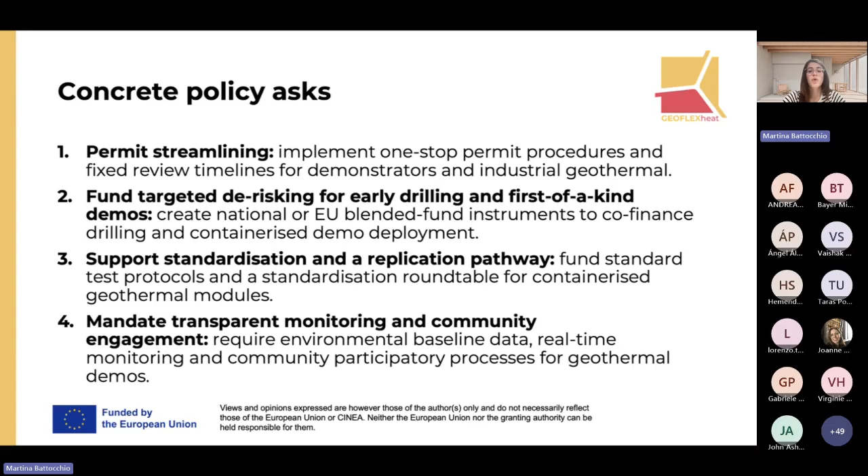As stakeholders, to shape Europe's clean heat future and make our voice heard, we can participate in European Commission calls for evidence and public consultations, and engage through working groups and the Have Your Say platform.

We can provide insights as experts via stakeholder advisory boards in European projects—most European projects foresee this type of advisory board—and also join the Clean Heat Industry Group that connects policy and industry voices, something we are doing at the European Heat Pump Association.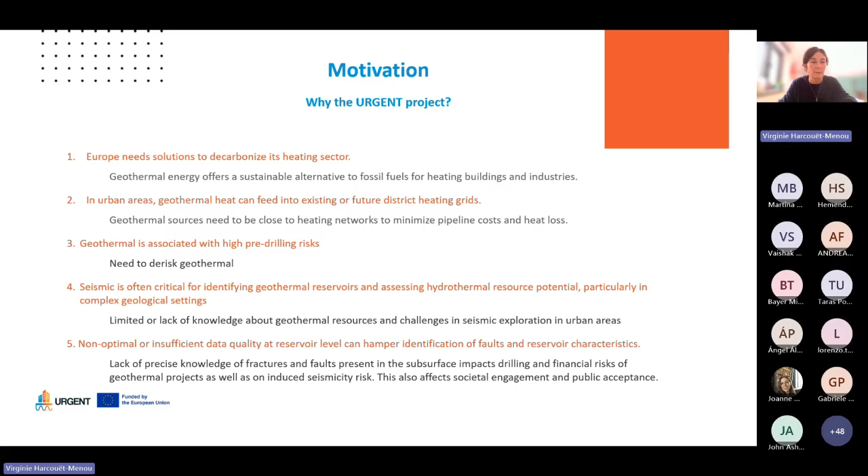Today it won't really be a technical presentation such as the one you saw for some of the other projects, but I want to rather give you an overview of the activities we do in Urgent and why we do them. So the different objectives we have: first of all, we have the objective to develop innovative technologies and workflows for seismic exploration of geothermal resources.

We have 5 specific objectives, the first one being linked to innovative acquisition technologies. So we want to enable low impact, affordable, high quality seismic data acquisition to de-risk geothermal development in key underexplored areas, and by that I mean also urban areas.

We also want to have efficient data analysis, so faster data analysis to improve reservoir characterization and fault detection, to increase drilling success rate.

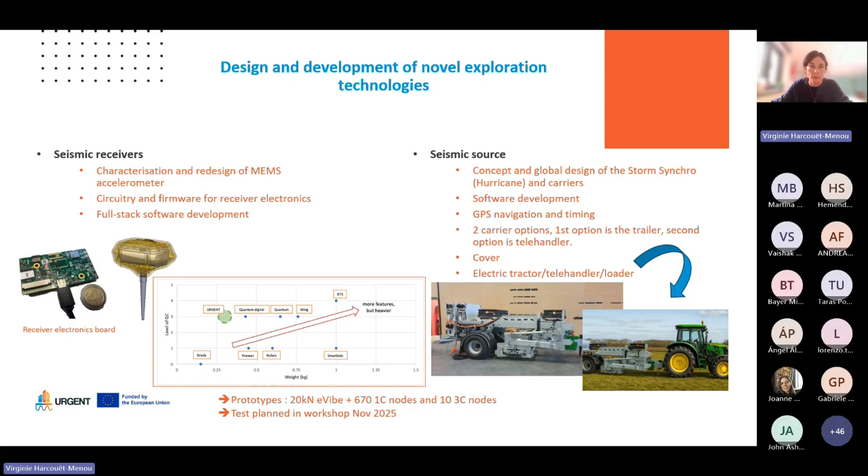At the end of the project, we will have a 20 kilonewton eVibe and around 700 nodes developed. These will be tested at the 3 test sites.

In addition to that, we also want to work on how to optimize survey designs. What can we do to reduce exploration costs? What could you optimize in terms of deployment of sensors, of shot points? For that, we have a partner, RTS, working specifically on these aspects. So far they have used data acquired at the Vito site last year, so 3D seismic data, to test some workflows to optimize and understand how you could reduce, for example, the number of sensors to be deployed.

At this stage, RTS is still finalizing the survey design for 2 of the sites, and the Vito site, where we will have a 3D small-scale acquisition, will be finalized a bit later. But the idea is to have 2 campaigns where we would acquire 2D seismic lines, one in Poland and one in Hungary. One is in a more or less urban context, and the other is on a sensitive industrial site where there is a refinery, and we want to prove that the technology developed won't be too impactful. We want to use compressive sensing and adaptive sampling to enable efficient imaging across the subsurface.

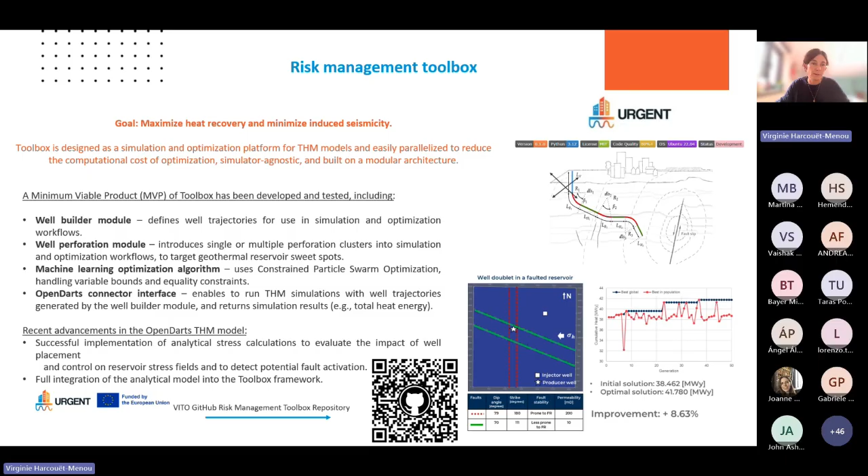The toolbox is designed as a simulation and optimization platform for THM, thermal hydromechanical models, easily parallelized to reduce computational costs, optimized, simulator agnostic, and built with a modular architecture. Basically, it gives you the best location to position your wells for a given project, knowing the position of faults, for example, and telling you what distance you should be from the fault, what would be the optimal position and architecture of your well, in order to have the best outcome in terms of heat, but also to make sure you would not trigger any seismicity.

And in parallel to that, we have a partner working on the development of AI and ML-driven algorithms for efficient post-processing and improved fault detection. It's DGB, and they are working mainly on improving the existing OpendTect machine learning software, where they start from the processed seismic data and help interpret it.

They work on two different projects. They develop an interactive machine learning driven workflow to facilitate interpretation of faults and horizons, and at the same time they are working on training a foundational model to predict faults and horizons via the interactive workflow. At this stage, this is still ongoing work, but I hope that if there is a next event organized, the partners could even present themselves the status of these different aspects.

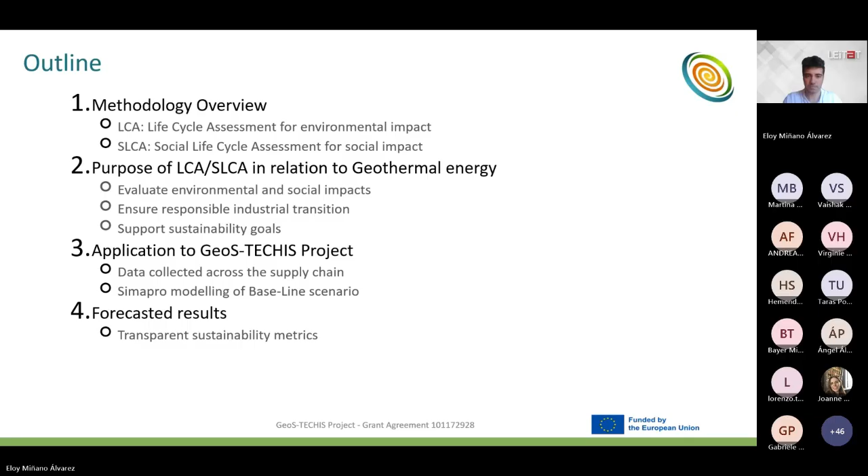So the life cycle assessment is a process to assess the environmental impacts of a product or activity over its life cycle. To provide some context, with the GeoS-TECHIS project that seeks to implement a geothermal system of conveyor belts in a factory, a life cycle assessment of this geothermal system would consider all the environmental impacts associated with this technology, from raw material extraction, manufacturing, processing, transport, and distribution.

Also the use of this geothermal system, the maintenance, and the impacts associated with end of life. So all these different phases are considered within an environmental life cycle assessment, and they have inputs and outputs, such as electricity, materials, or waste. All these inputs and outputs also have environmental impacts, and the results of the environmental life cycle assessment are the final outputs of these impacts.

Once the environmental impacts are calculated through the environmental life cycle assessment, it's possible to detect hotspots - we see which impacts are high or low, and we detect these different hotspots. Then we develop strategies in order to mitigate these hotspots. It's a robust tool for assessing environmental impacts because it's reliable, based on ISO standards, and the databases have constant quality checks. It's also consistent, and its results are credible, and it has assumptions and uncertainties, but it's reliable.

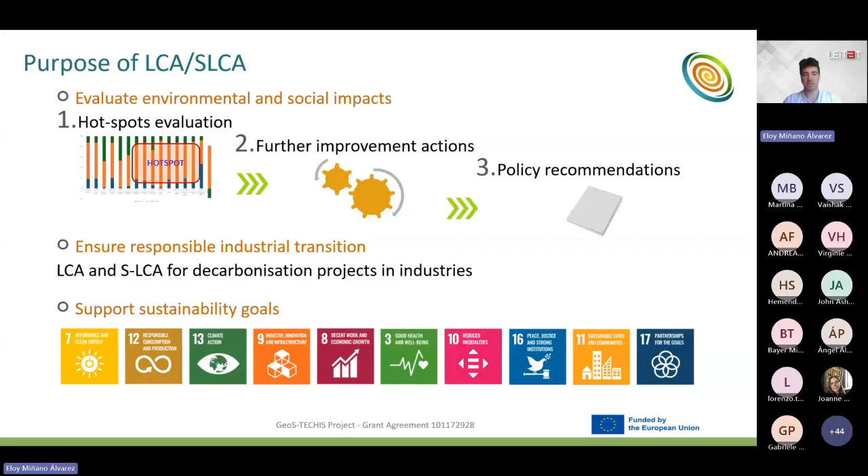And finally, this analysis can guide policy recommendations, and in the GeoS-TECHIS project it's expected to influence policy by the development of a roadmap. The final objective of developing this LCA and social LCA is the decarbonization of industries based on geothermal energy technologies, and these analyses are supported by sustainability goals.

And this is the functional unit: 1 kilowatt hour of heat delivered to the user, a geothermal system to provide 3,250 megawatt hours for industrial production of conveyor belts over a minimum service life of 30 years.

So in the analysis, we'll consider the elements related to energy. We don't consider the machines, for example, related to the production of conveyor belts. And all these elements related to energy, we evaluate their impacts from raw material extraction until disposal, so the full lifespan. The analysis is to compare the factory as it is right now to a future GeoS-TECHIS scenario with the geothermal source, to see how the environmental impact changes and if it's a positive thing to implement this geothermal system.

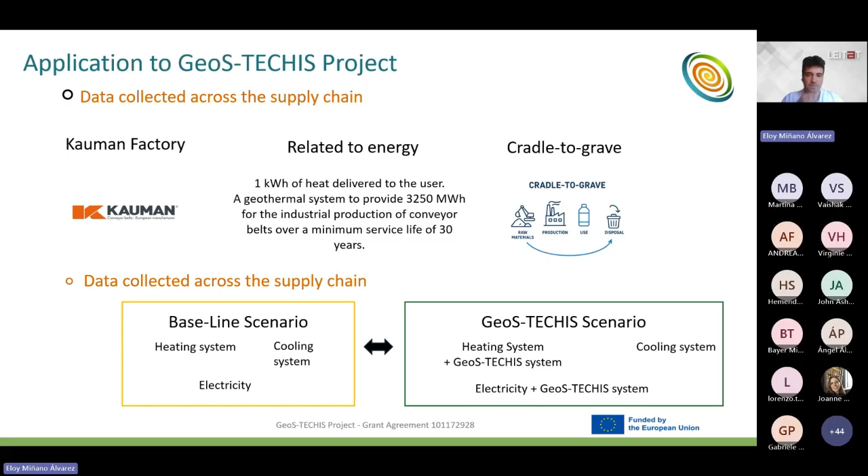For the moment, we have just modeled the baseline scenario. As you can see, the 3 systems are also divided. We have modeled them divided into 3 different sections: construction, use, and end of life. The heating system has construction; for example, we have modeled the boilers, the natural gas tank, and other elements that are within this construction.

Also, the use phase is, for example, the burning of natural gas, the transport of the oil that is used within the factory. The end of life currently in the common heating system is the valorization of oil. So we model all this in a SimaPro tool. Also, the electricity comes from the grid. And the cooling system, some example of construction can be the pools that have been constructed for cooling the system. They use tap water, and the end of life is wastewater.

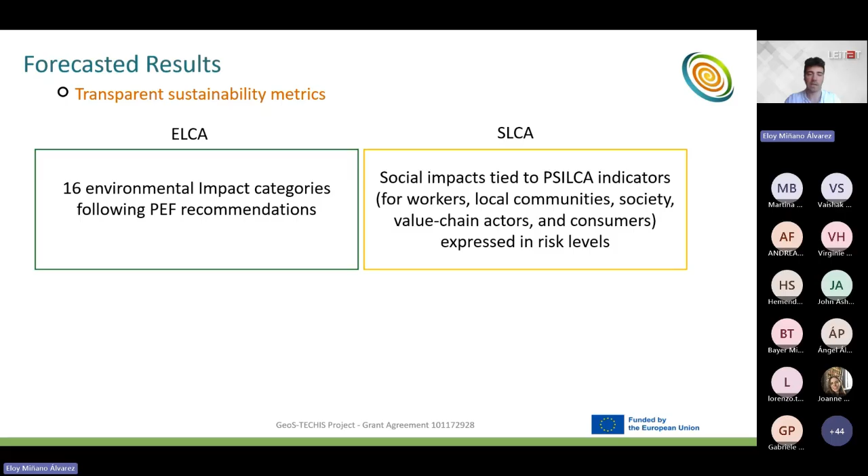And the results, after modeling all this with the SimaPro tool, can be 16 environmental impact categories following the PEF recommendations. And in the social aspects, social impacts tied to PSILCA indicators for workers, local communities, society, value chain actors, and consumers, and are expressed in risk levels in the end.

And that's it. Thank you very much for listening.

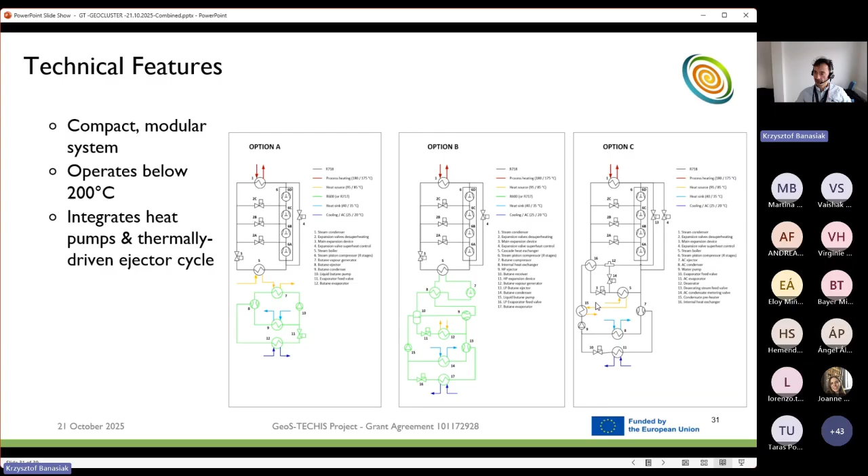But nevertheless, option A, meaning a nice combination of steam-based cycle with steam-based heat pump, combined with butane or propane, in other words hydrocarbon-based ejector cycle, is the solution that most likely should be followed.

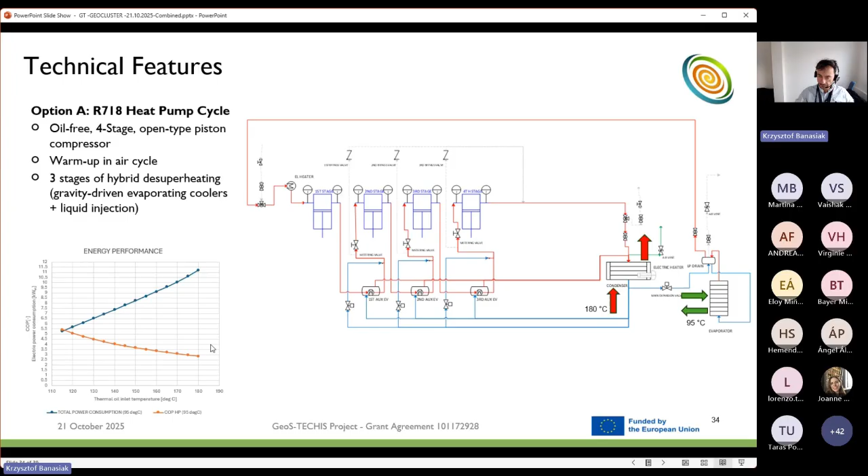So what we plan to do - we truly hope that before we press the button and run, we will have the chance to test both units, both installations, in our SINTEF lab. Once we have figured out all those, most likely happening, tiny imperfections and refined the system, both units would be installed at the test site, which is the Kauman manufacturing place. This is where we also want to launch the system to perform a real duty operation. That's the plan for us from a technical perspective.

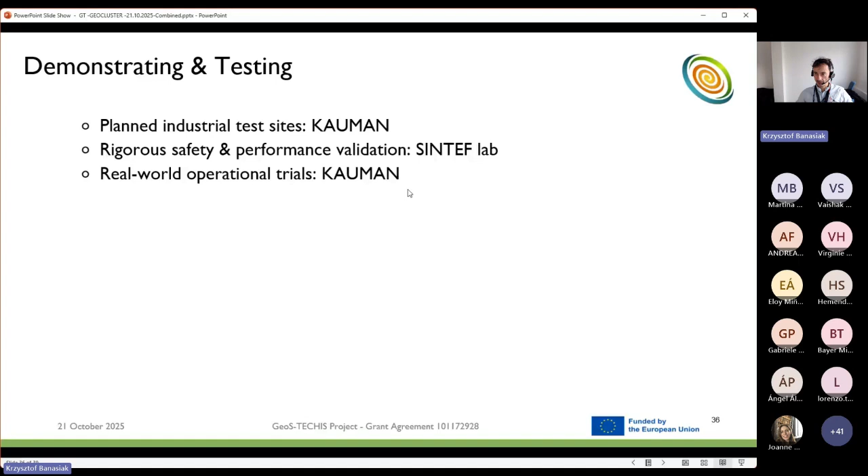Thank you very much for your attention.